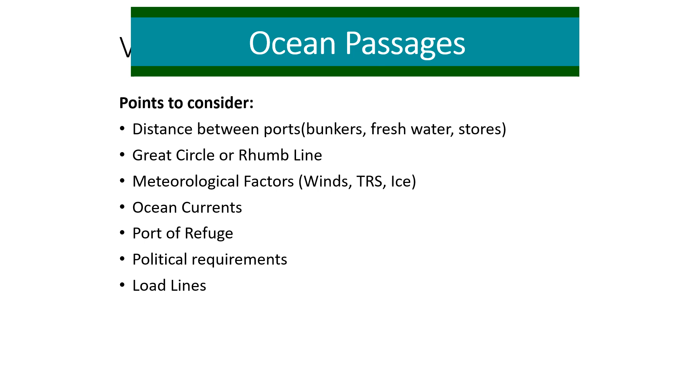Then the load lines have to be considered. Sometimes the load line of your port of departure and the port of arrival may be different. So you have to ensure that if you sail out on a deeper draft or a deeper load line, you may have to compensate with the consumption of the stores or ballasting, deballasting, but finally adjust your load line such that at the next port of arrival, you are at the appropriate load line. So if you have sailed out on a summer load line and you are going into a tropical load line, you have to consider all that accordingly. The other points that you have to consider are the distance off coastlines and dangers.

So if any part of the passage involves you coasting along a landmass, then you have to make sure that you keep a sufficient distance from it, because along the coast you will have shallower depths of water, you will have more dangers to navigation, you may have wrecks, or sunk ships or similar dangers, or you may have rocks, islands, so you may have to keep a sufficient distance off. And yet at the same time you have to ensure that you are sailing along the shortest route possible. You cannot take a longer route, because then your company and your ship owners will frown upon it.

The possibility to conduct parallel indexing. I'll show you the examples of parallel indexing and what it is. So parallel indexing also refers to keeping a parallel distance of coastlines or dangers to navigation.

We'll talk about wheel over points, at what point of the passage or what point during your ship's track you alter your course to the next course, and at what point you start putting the wheel over to ensure that your vessel turns in sufficient time and with sufficient turning radius to join the next course or the next track in the most economical way, without wasting too much fuel or coasting time.

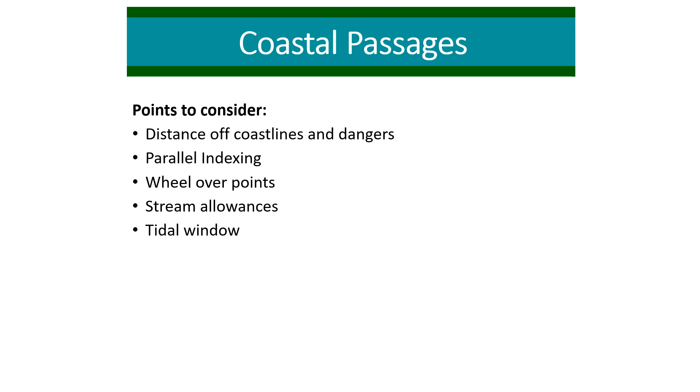We'll talk about stream allowances, tidal stream allowances, and whether they support or whether they go against the vessel's passage. The tidal window talks about draft and under keel clearance restrictions. So you have to ensure that your ship always has sufficient depth of water to transit. So accordingly, you have to calculate the tides based on the draft of your ship, and then ensure that you have sufficient depth of water under the ship, which is called the under keel clearance, to ensure the ship is always safely navigating in all waters, whether it's pilotage waters or whether it's a coastal or ocean passage.

Then you have to think about the routing requirements, which are the shortest passages, and what kind of weather you will experience, currents and other factors that come into play. The reporting requirements to the vessel traffic services or VTS, and I'll cover this more in detail in my next video, but I'll briefly touch on this in this video.

So we have the reporting requirements to VTS and port authorities. So pilotage, contacting the pilotage, port authorities, harbor master, VTS. During a narrow channel, you may have to contact several VTSs, especially if you have been transiting the Malacca Strait. You know that in the Malacca Strait you have several reporting points, so you have a couple of different VTSs that you have to report to.

And then you have to think about pilotage requirements. Now most of these places you need a pilot, and you have to consult a pilot because the pilot is the local expert, but there are ports in the world where sometimes the master takes in the ship, so you have to make that consideration, the choice and the decision whether you would require a pilot to take you inside the berth, or whether the master is going to do that.

And then of course the positioning availability, whether the ship is going to use satellite systems such as GPS for position plotting, or celestial navigation, or taking bearings and ranges of coastal landmarks. Whether you have sufficient depth of water or areas available: if you go into the pilotage waters and you realize the berth is not available, do you have enough available space for dropping the anchor, or are you going to drift around? Similar factors like that. And of course, we have talked about the port of refuge already, so I will not repeat it again.

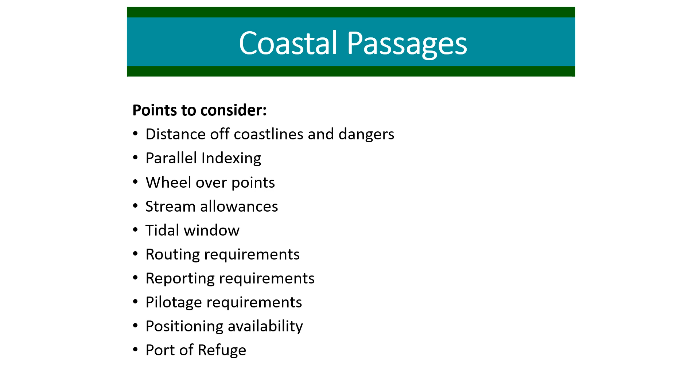Some of the other points to consider are your navigable limits or margins of safety, whether you have sufficient margins of safety to coast along or make alterations or turn the ship around when required, or alter your ship's course to prevent collisions.

Any landmark identification, so prominent landmarks need to be marked and brought to the notice of the officers, so that when they are passing the landmarks, they may make a note of it. They may also use it for position plotting. They may also use it for parallel indexing.

The no-go areas have to be plotted strictly. These are the areas where the vessel cannot go into in any case, and if there is any threat of the vessel going into these areas, then the master should be called, so the officers should be notified about it.

The point of no return. The point of no return is the point after which you cannot turn back. This is normally the point from which you would then proceed into the pilotage, and you would receive the pilot, and the pilot will take you into the waters.

Otherwise, you have the contingency anchorage, so the point of no return. Beyond this you cannot return, but before the point of no return, you can always turn your ship back, especially if there is any kind of delay or the pilot is not available or the berth is not free. Then you can go and seek a contingency anchorage.

That means a backup plan, a plan B, where you may drop the anchor and wait for the pilot to become free or the berth to free up, and that will be safe for your ship rather than you drifting along, with the possibility of you drifting into the passage of another ship which may be entering or exiting the port.

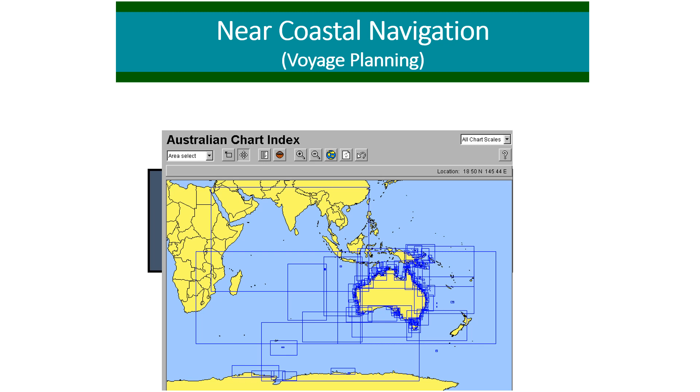Alright, this is again an example that I'm showing you here, that the further deeper you go into a particular area, this you can see is the Tasmanian island. So if you go into the Tasmanian island, depending on whether you are transiting the east coast or the west coast or the north or the south part of it, you can go deeper into it and then select the appropriate charts accordingly.

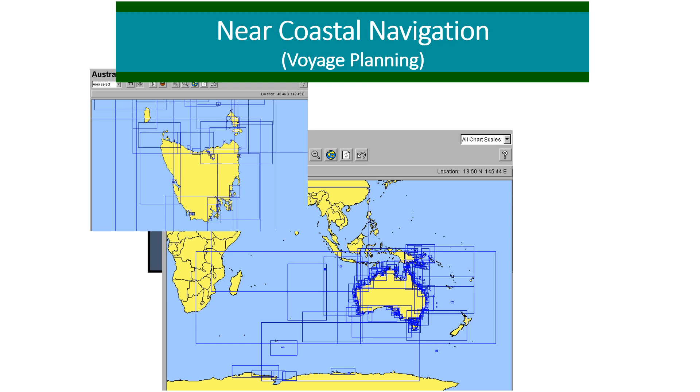All right, but at all times you must ensure that you are selecting the largest scale charts available for that area. As you can see here, I am showing you the scale of charts, the chart number, and the areas that it covers. This is just an example for a particular area here, but anywhere you go in the world, this is pretty much the system to make sure that you get the proper chart available.

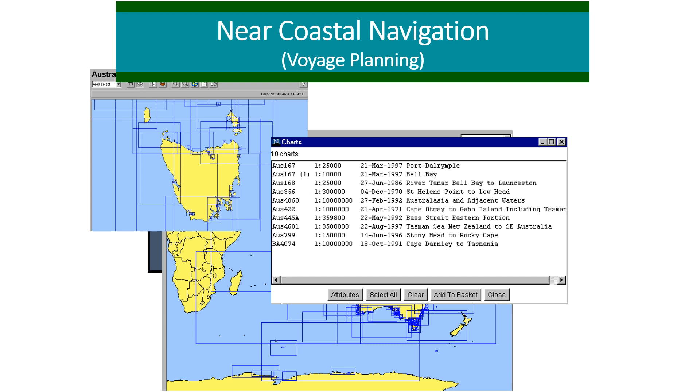Now, you also have the notices to mariners available as well. So make sure that you use the notices to mariners to correct your charts and publications. They should be corrected up to date. Sometimes I hear of people joining ships where the charts have not been corrected, and that's not a good practice. But in case you do experience charts not being corrected up to date, you can always consult the annual notices to mariners or the cumulative notices to mariners, which provide corrections up to the last 2 years, and you can find out up to which correction your chart has been corrected and then correct the charts accordingly.

I know it's a bit time consuming, but you have to do this. You have to make sure your charts are always corrected up to date. If you are sailing and you are going to be signing off very soon, make sure that you update and correct all the charts and publications, because it's unsafe to sail with charts or publications that are not up to date, because you may run into a danger to navigation, which is not safe for the ship.

Of course you have electronic charts, and you have corrections available on CD-ROMs or USBs, and all you have to do is pretty much plug it in and run the software and it corrects the charts. But I'm talking about the paper charts here, which require a bit of manpower, and it's a bit of a tedious process. You have to correct each of these corrections individually, and you have to do it yourself. Of course, if you are relying completely on electronic charts, the system is much easier. It's easier and quicker to do so.

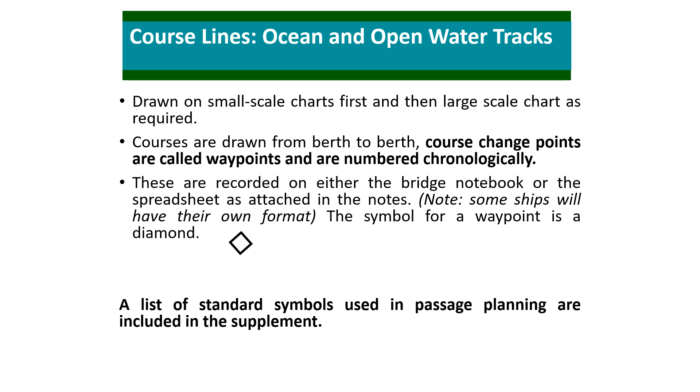Courses are drawn always from berth to berth, and course change points are called waypoints and are numbered chronologically. I'll show you an example of waypoints, what they are and how they are numbered. The waypoints are recorded on either the bridge notebook or the spreadsheet, as I'll show you as attached in the notes. Some ships have their own format. The symbol for a waypoint is normally a diamond. If you are using a separate system, I'm not sure about it, but most of the times we use the diamond shape here. A list of standard symbols used in passage planning is included in the supplement section in the chart catalog, in the NP5011, which is chart symbols.

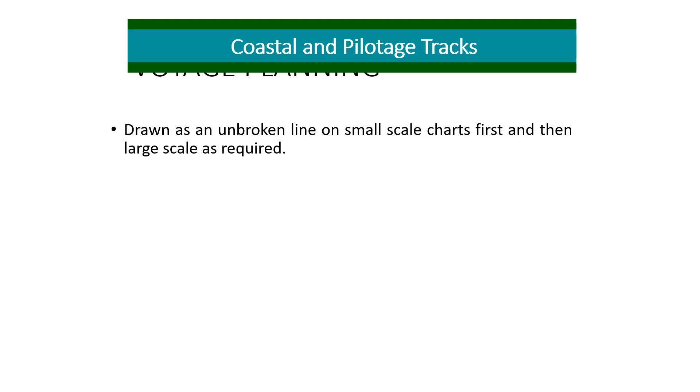Now, coastal tracks are drawn as an unbroken line on small scale charts first, and then large scale as required. True direction is shown clearly by the track with an arrow. So we show the direction in which the course is proceeding, as well as the course written in numbers, and it is always written in true direction. It's always true course. Transfer of tracks from one chart to another must be done carefully by range and bearing from a known object. Sometimes if it is not available, you may use a GPS position, but we normally use a known position and then transfer the course line when going from one chart into another chart. Verify the latitude and longitude of each waypoint, and don't forget about the chart datum.

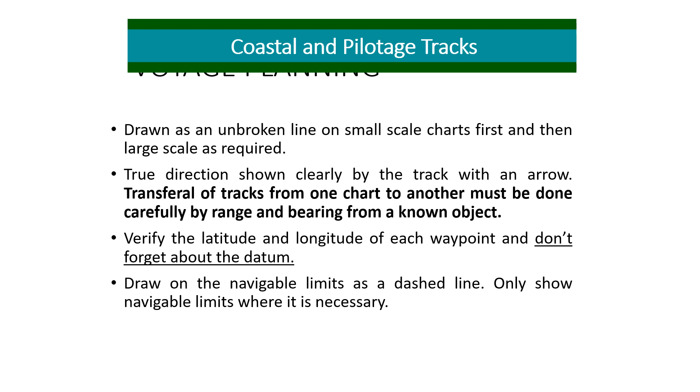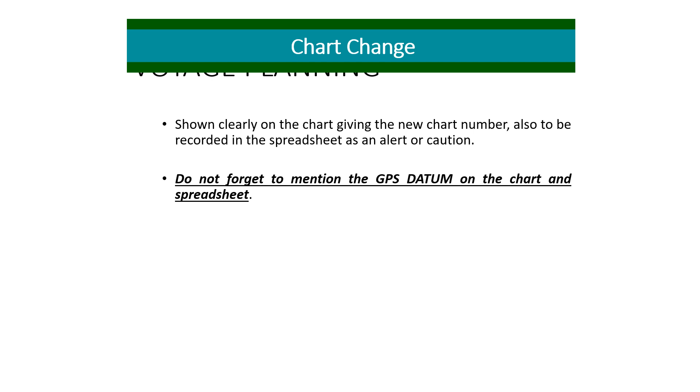Draw on the navigable limits as a dashed line, only showing navigable limits where it is necessary. And I think I have a few examples; I'll show you what they look like. The change of the chart is shown clearly on the chart, giving the new chart number, and it should also be recorded in the spreadsheet of the passage plan as an alert or a caution. You may also mention it on the course just before the chart is required to be changed, by making an arrow and writing that the next chart is so and so. Do not forget to mention the GPS datum on the chart and the spreadsheet as well.

Do not take any unnecessary risks in terms of clearing distances. Always consider the consequences of engine failure or navigational error. Now, for drawing clearing distances, you must consider the following points. The draft of the ship in relation to the water depth. Make sure that the ship is always at a safe distance from any dangers to navigation. So to do so, you must always consider the draft of your ship in relation to the available depth of water.

You must consider the likely weather conditions, the direction and rate of tides and currents, traffic density of other ships and flow of traffic, and age and reliability of survey, and hence chart information. So when we talk about survey, we are talking about the survey based on which the charts have been constructed.

You should not take any kind of risk when drawing clearing distances. You should always keep your ship at a safe distance. Remember, safety of ship is foremost, and after that only we talk about any kind of delays or longer distances. If you keep your ship safe, that's the most important bit in planning the passage.

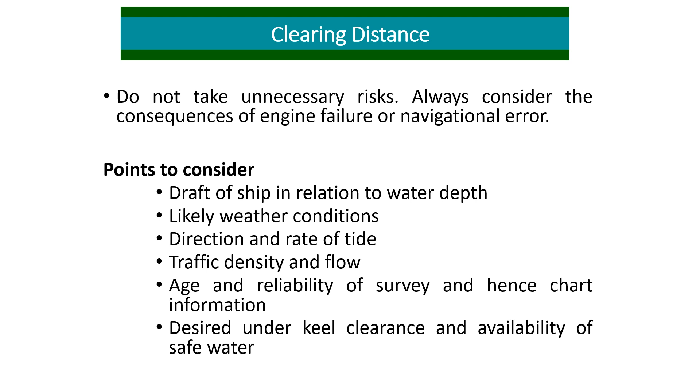Also keep in mind the desired under keel clearance to ensure that your ship always has sufficient depth of water under the keel and the availability of safe water. For example, if you have contour lines that show your draft, and your draft is up to the 3 to 6 meters contour, then you must pass outside by about 10 meters. Your clearing distance should be about 10 meters.

If the contours are 6 to 10 meters, then you must pass 20 meters, and if they are more than 10 meters, depending on the UKC, pass clear of that as well. Remember to allow maneuvering space if the ship must alter course for traffic as well.

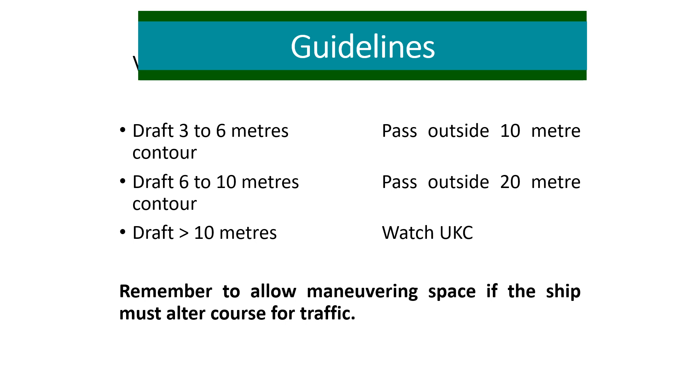We were talking about waypoints before, and I thought I'll show you the waypoint as well. So you can see the waypoints have been shown in the form of diamond shapes. Each waypoint is shown in the diamond. A waypoint is the position on the chart where a planned change of course occurs, and the waypoints are numbered and form the framework or reference grid of the passage plan.

So normally you start with waypoint number 1, and then you proceed on to waypoint 2, 3, 4, and so on. Or you may have a different waypoint numbering system depending on how you have fed the waypoints into the GPS. So I'm not here to tell you how to number your waypoints, but basically most of the time they go in a chronological order, but sometimes it may also depend on how you have fed these waypoints into the GPS.

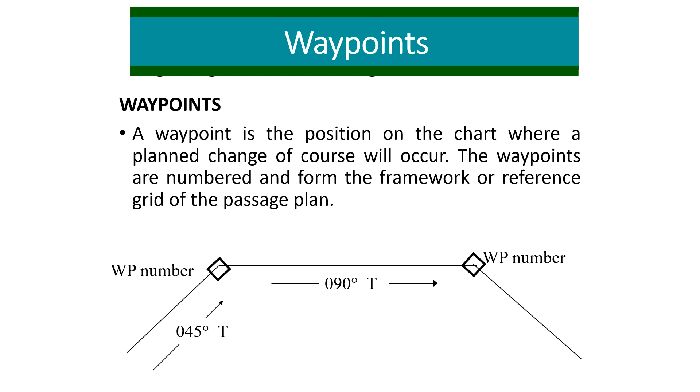But make sure your waypoints are numbered, and the numbers can be easily seen, so that the officers who have not been part of the passage plan can also easily identify them and find out information about them from the GPS or any other related equipment.

A caution, alert, or warning is a position on the chart where some planned change of status or event should occur. Again, referenced back to the waypoints, they are meant to inform the navigator of a change or alert that is due to take place. For example, if you have a wheel over point, or a point of no return, or a contingency anchorage, all these can be written as cautions or alerts or warnings.

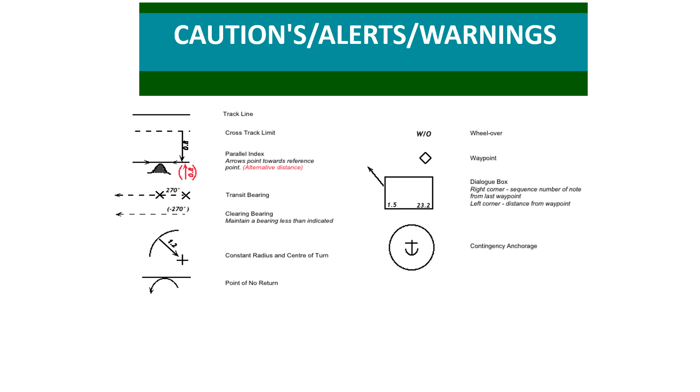And you have to always remember that you may have been part of planning this passage, writing it, constructing it, but other officers may not have been so actively part of it. So you have to consider that this is the first time they are seeing the passage plan. So you have to draw their attention to any relevant points, any cautions, any alerts, or any relevant warnings as well.

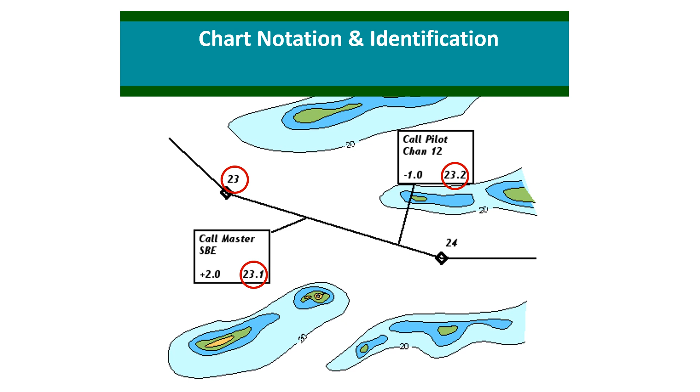So after you leave waypoint 23, you have important information available in the form of 23.1 and 23.2, and the important information is first you have to call the master and provide the standby engine position, and 23.2 is the information referring to call the pilot, and the channel is given as well.

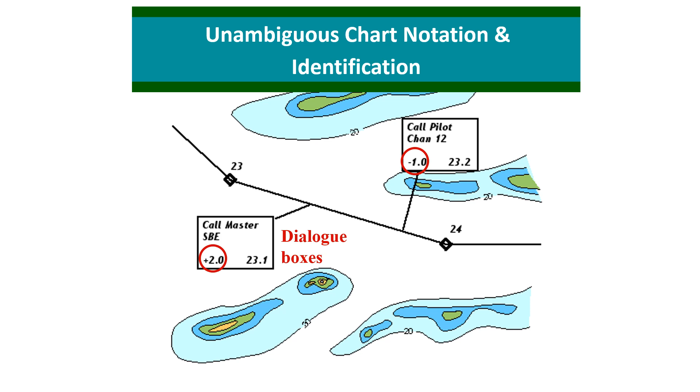All right, make sure your chart numbers and chart notations and identification are unambiguous. There are no doubts about it. These are the distances to the waypoint and from the waypoint. So location measurements help to reconstruct the chart. Course alterations and wheel over points. This coincides with the planned track.

However, in confined waters, it can be essential that a ship maintains the planned track, so allowance must be made for wheel over positions. A useful rule of thumb is to allow 1.5 times ship's length for the wheel over distance, but it can also vary depending on the ship's maneuvering characteristics and engines and how responsive your ship is to helm movements. It is always better to define the wheel over as a line rather than simply a point on the track. So I'll show you an example here.

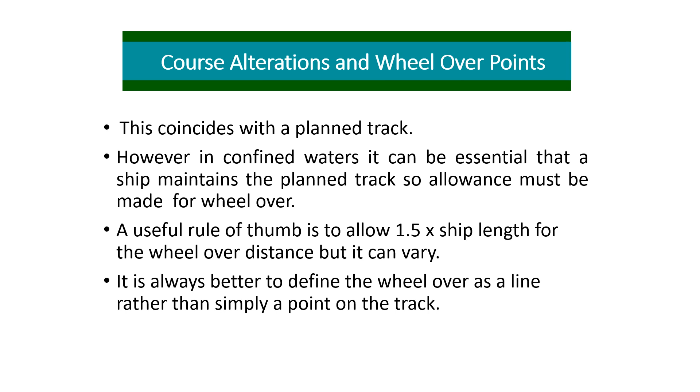So you can see the example here. The wheel over point is shown normally as well as a parallel index. So what you see on the left side is a wheel over point shown normally through a dotted line or a dashed line, and you can see from that point over you have to alter your course from 030 to 070. So the point where the dashed line intersects the firm line is the one that you start making the alteration to the next course, and by the time your ship reaches the next waypoint, your ship will be ready to join the next course of 070 from the original course of 030. The wheel over distance is marked there as well.

What you see on the right side is another technique of showing the wheel over point, but here the technique used is a technique of parallel indexing. So you can see that the intention of the officer here is to make sure that your ship during the alteration of the course from 262 to 222 is always keeping a safe distance from a landmark. Maybe that's a landmark, or maybe it's a wreck or a danger, which you see as a dark black line, and then a minimum distance of 1.8 miles is kept from the danger.

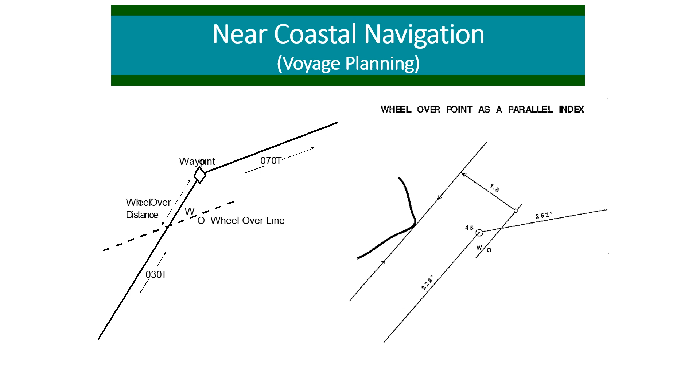A parallel line is drawn from that danger to your ship's track, and the wheel over mark is again shown, this time as a firm straight line, and that is the point from which you start altering the ship's course, and at the same time keeping always a safe distance from the danger to navigation.

The maneuvering diagram is made use of as well to determine the wheel over points. It also enables the navigator to decide in advance the amount of rudder to apply. So of course the maneuvering diagram is available on the wheelhouse. If it is not, it is available in the maneuvering booklet. So make sure you put a copy up on the wheelhouse and use this maneuvering diagram to get an idea of how responsive your ship is, because that will also help you to decide how far in advance you should start applying the ship's rudder to make a particular alteration of course.

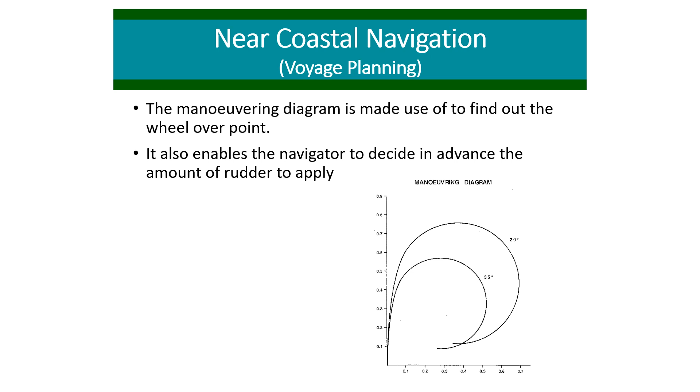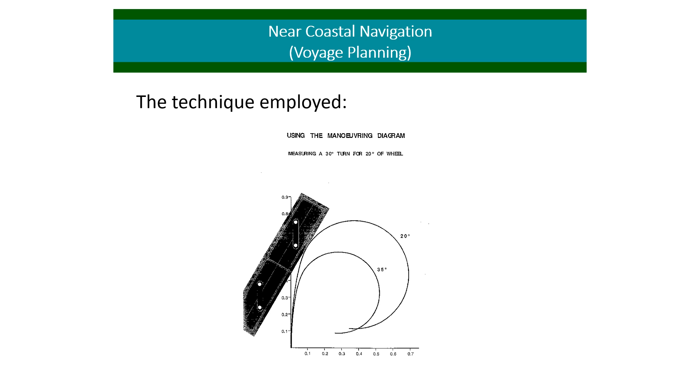All right, again here you can see the information related to wheel over points and turning of a vessel has been provided, and you can use this information; for example, here you can see measuring a 30-degree turn for 20 degrees of wheel has been shown, and officers may use this information to plan the wheel over points on the passage. In terms of radar navigation technique and parallel indexing, I'll show you a few extracts and pictures.

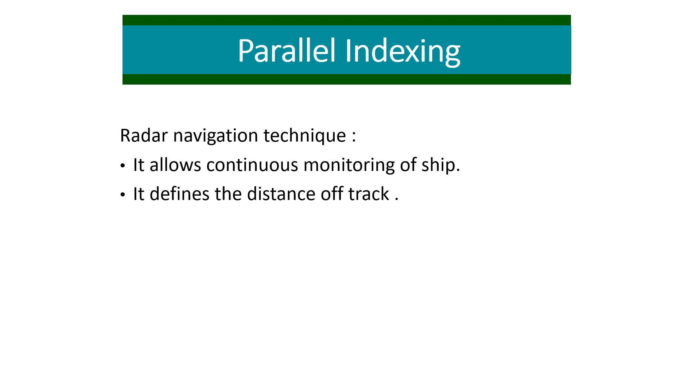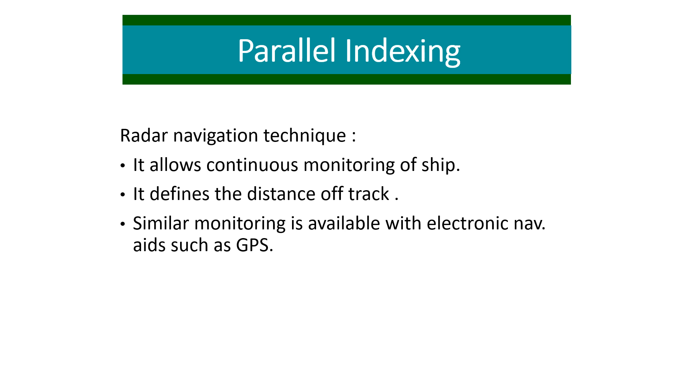That is the distance that you have to keep at a minimum from a danger to navigation, and that helps you to keep a monitoring of the information electronically, because you may be busy with alteration of courses, or there may be traffic in those areas.

You don't have the time to keep plotting the ship's position on the paper chart and measure the distance. At that time, it's very useful to monitor the parallel indexing on the radar screen, because it immediately gives you an idea. It takes some time, but it gives you an idea in a quicker time and tells you how far you are away from the danger to navigation.

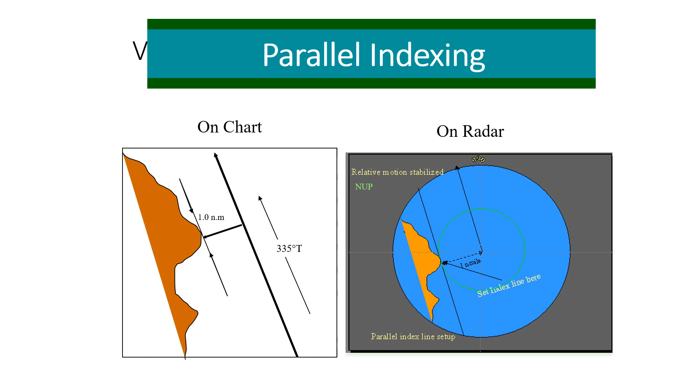You can see parallel indexing techniques have been used throughout, and the distances have been used to measure on the radar as well. Low-lying area not suitable for parallel indexing references, and if available, change to a reference ahead. So you can see throughout the passage parallel indexing techniques have been used, and minimum safe distances have been kept off dangers to navigation. That could be islands or shallower depths of water, and you have to use this system.

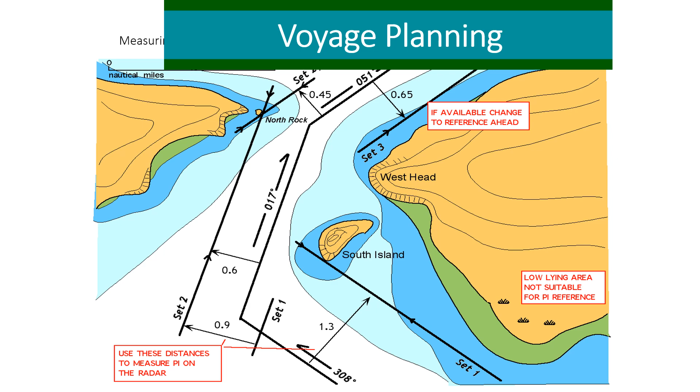Then we have abort points and contingencies. So when approaching constrained waters, the ship may come to a position beyond which it will not be possible to do other than to proceed, termed as point of no return. So after point of no return, you cannot turn your ship back. You should have by then either proceeded with the pilot and gone into the berth, or you may have been taking the ship yourself inside.

Having passed the abort point, the plan should include contingencies for if the ship may have to take emergency action. The contingency plan can include an alternative route or a safe anchorage or a waiting area where it is safe for the ship to just drift around, or emergency berth to wait for its original berth to get cleared up.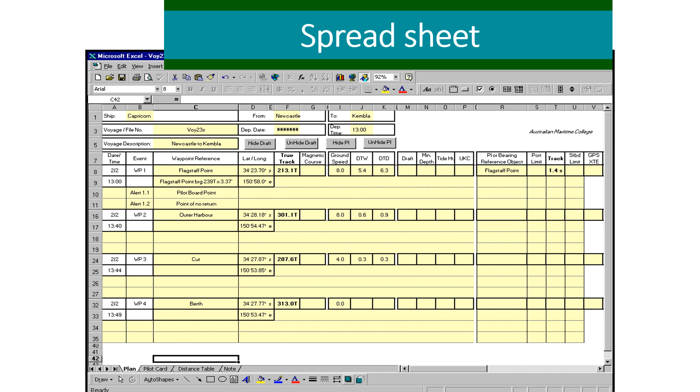So if you make a spreadsheet like this, this should be available for others to see as well, for the other officers to monitor the vessel's passage and progress during the voyage. This video has become a bit longer than what I would have liked it to be, but I had to cover all the essential points of a passage plan.

But it's not over, guys. I'll be making a series of at least 5, 6 or maybe more videos. And in my next video, I'll continue talking about passage planning, but in that I will specifically talk about ship routing systems, or vessel traffic service systems and the reporting procedures regarding these systems.